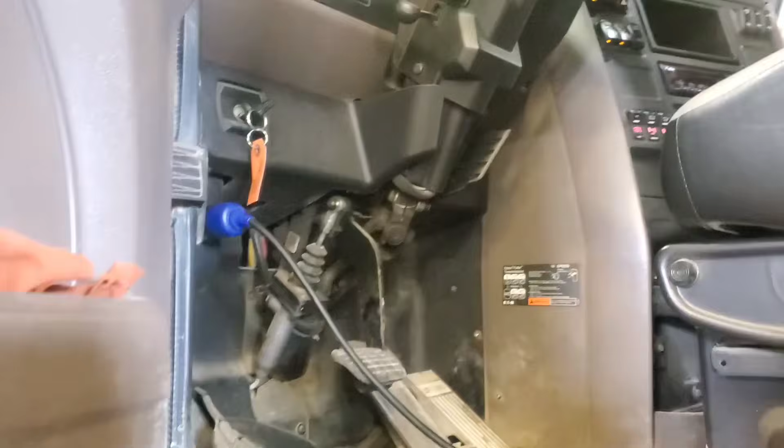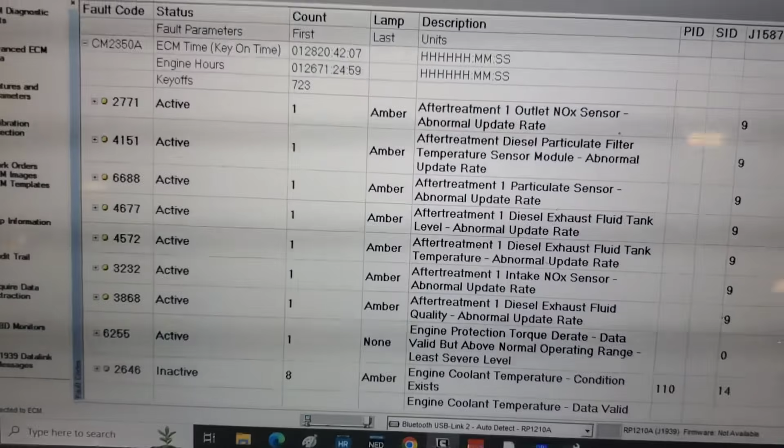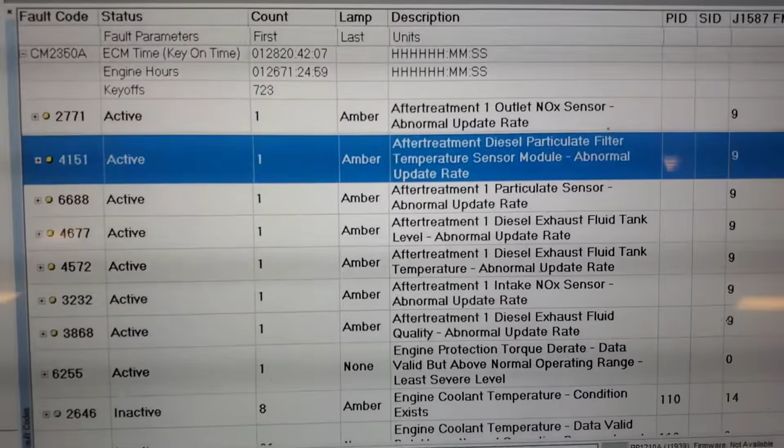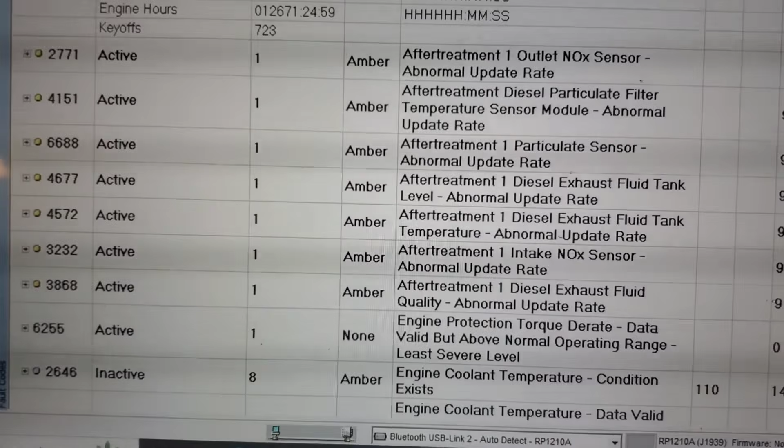What's going on, everyone? Got this unit here that has check engine lights and DPF lights, everything on. Hooked up to it, and we have every code in the book for the aftertreatment. So we have our NOx outlet sensor, DPF, temp module, particulate sensor, like all our aftertreatment codes on this thing. So that's leading me to believe we have a failed power or ground circuit that's providing the voltage to all these sensors, or we could also have a failed data link.

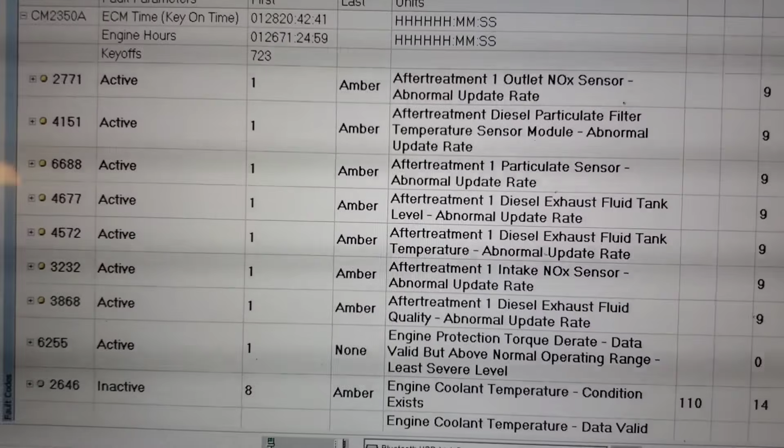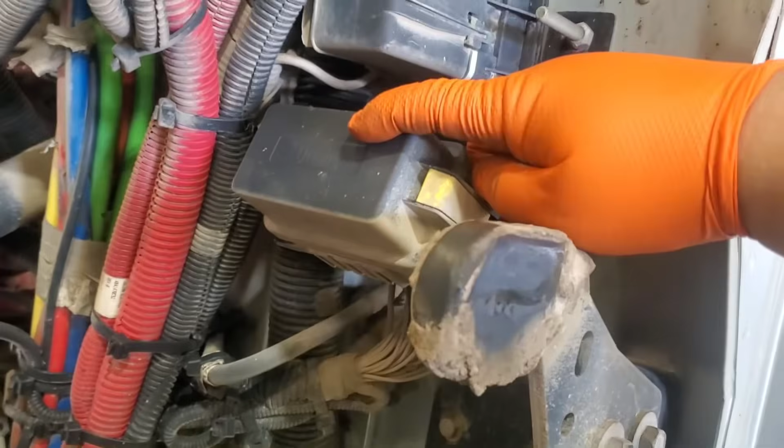So basically what I'm going to do is just grab any one of these sensors and perform the voltage and ground test on it. First thing though, I'm just going to go to our aftertreatment PDM and see if I got any blown fuses or anything. Okay, so this unit's an International HX, which on these chassis, the aftertreatment PDM is right here. Makes it nice and easy. So I'm going to open this up and see if I have any blown fuses.

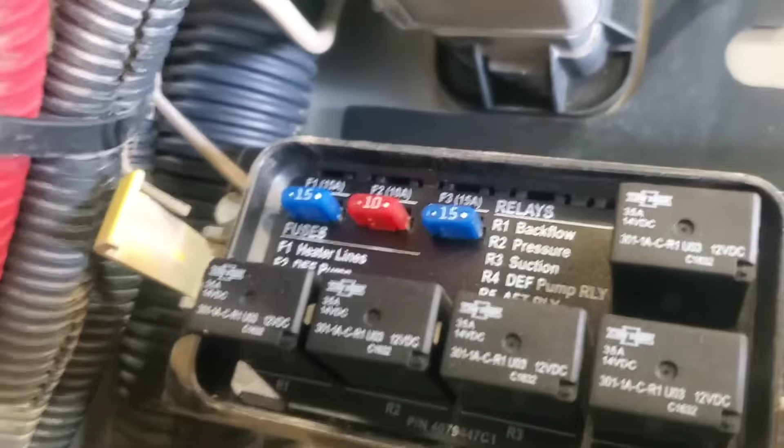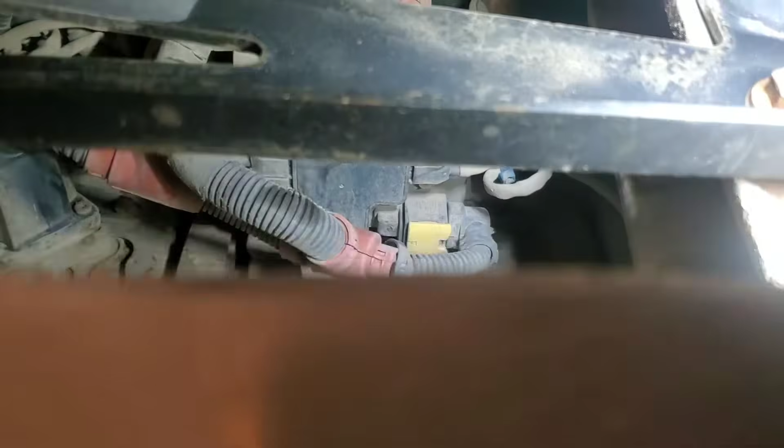Alright, well, I tested all the voltage for those fuses. You got volts on both sides, so none of the fuses are bad. I'm going to go ahead and just grab power and ground and the data link off one of the sensors. So preferably the easiest one, so I'm just going to find which sensor is easiest to get to. Okay, the temp sensor module is right there. You can see that yellow connector hooked up to it. That seems to be a pretty decent one to get to. I'm just going to remove this shield here, then I'll be able to get right in there and pop that off and do some tests.

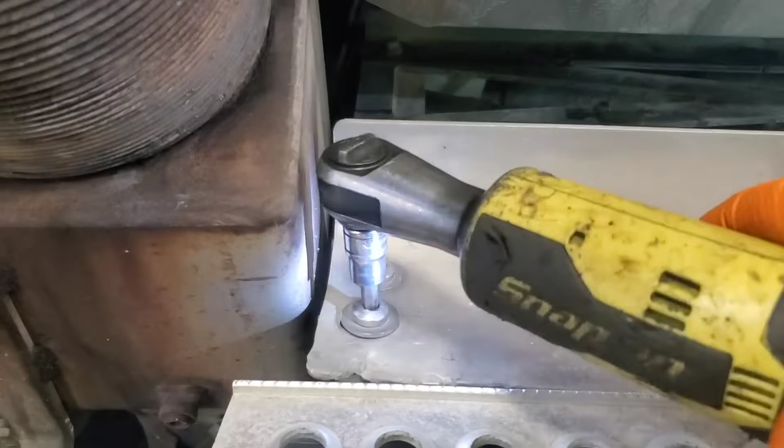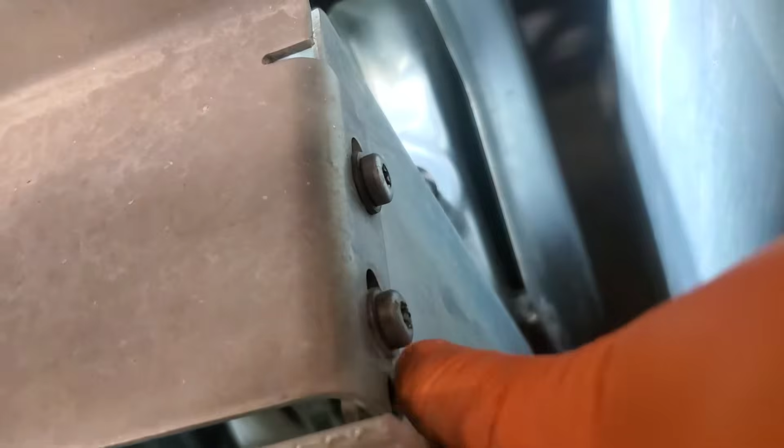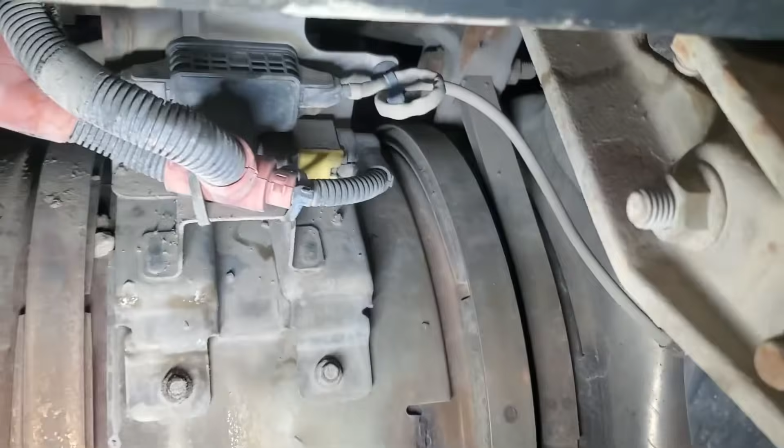Classic. These ones have nuts on the other end, and this one's stripped, so that's cool. Okay, got those out. Just these last two here. Okay, there we go. Now, got a nice clean shot to pull that connector off. But look what I found here. Those clamps are all rotted and split. Let's get a better look down below. Alright. Yeah, look at that. That sucks. So pretty much this whole system's gonna have to be dropped to fix that.

Got to notify the customer about that. Hopefully we don't get the good old "well, it wasn't like that before I brought it here" treatment, because that happens more often than not.

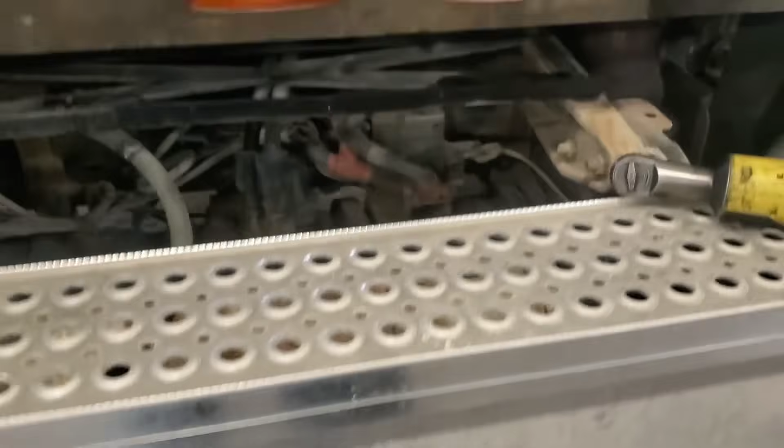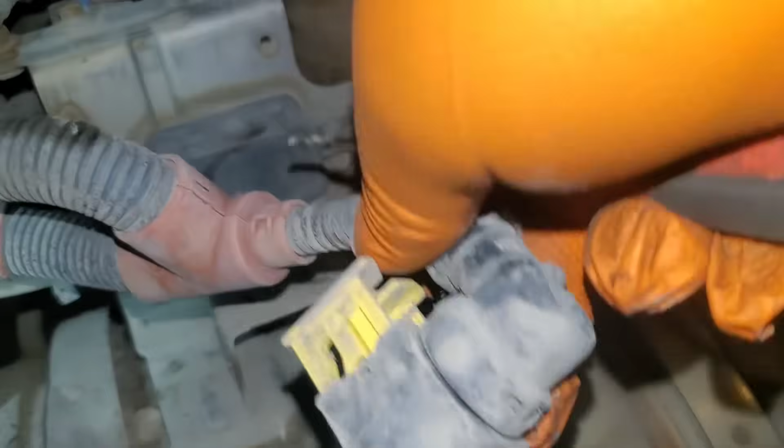Alright, got to be a little careful with these connectors so they don't break. I'm just using the hook tool like this, coming in there and kind of prying out. As you can see, pull it out and the connector comes off. Sometimes you got to be a little more careful so it doesn't break. But now you're gonna have power, ground, and your CAN high and low circuits. So I'm gonna test to see what I have there and what I don't.

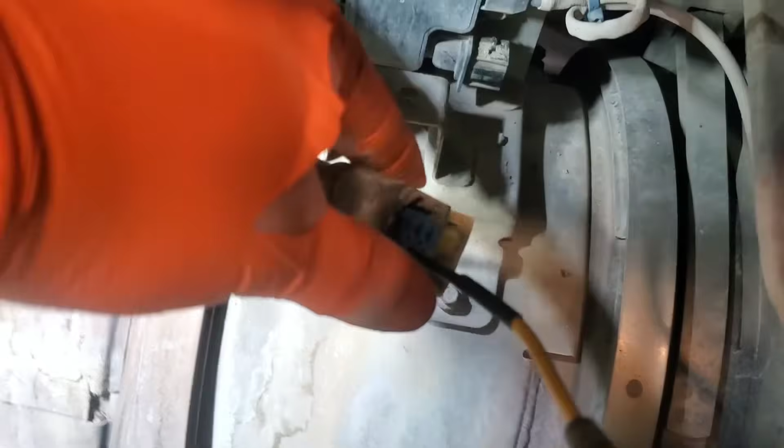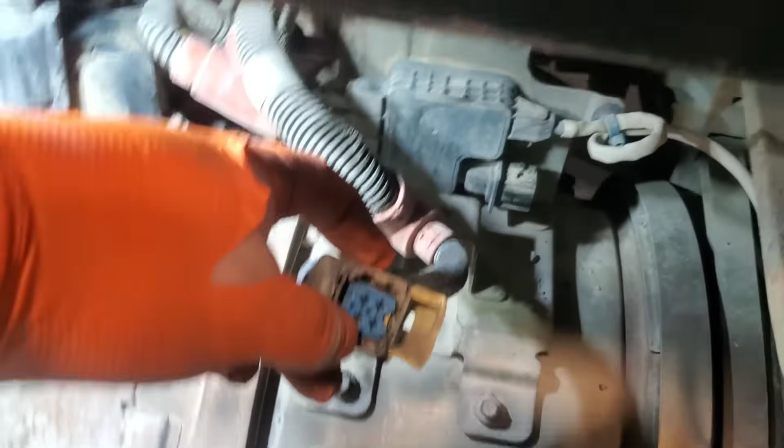Okay, so I have my CAN high and low and I got a good ground. This is the power circuit here. I'm getting nothing on this. So our issue is a power issue. Since our fuses are good, the problem is between the fuse and the circuit that powers the whole aftertreatment harness. So gotta find where that tees off and goes in and supplies all these sensors. Now there's a spot on these HXs that I found bad before, so I'm gonna start there, which is by the PDM.

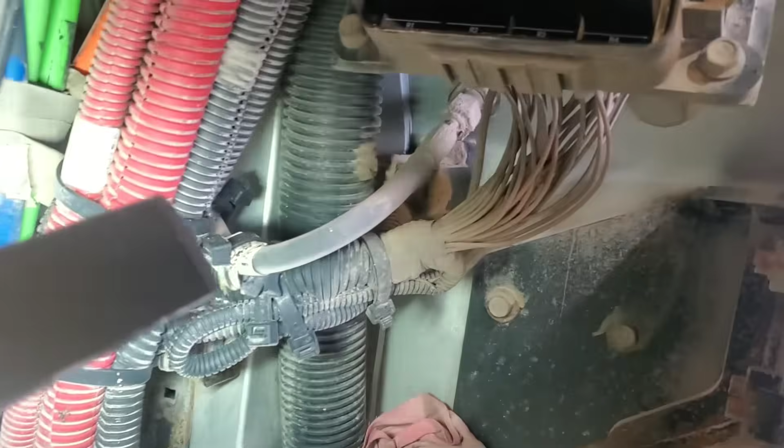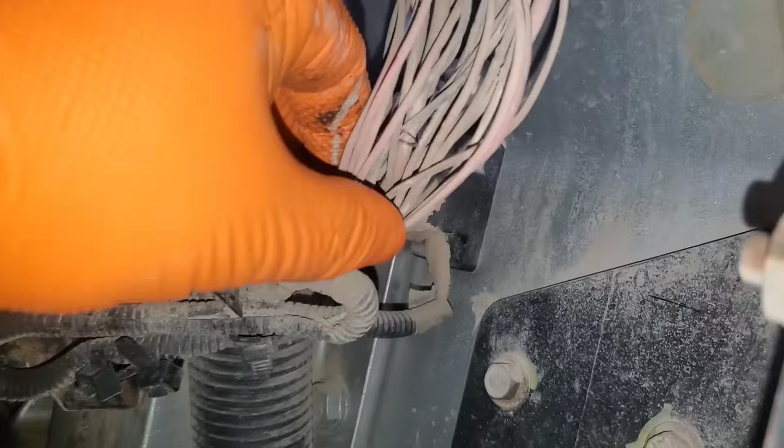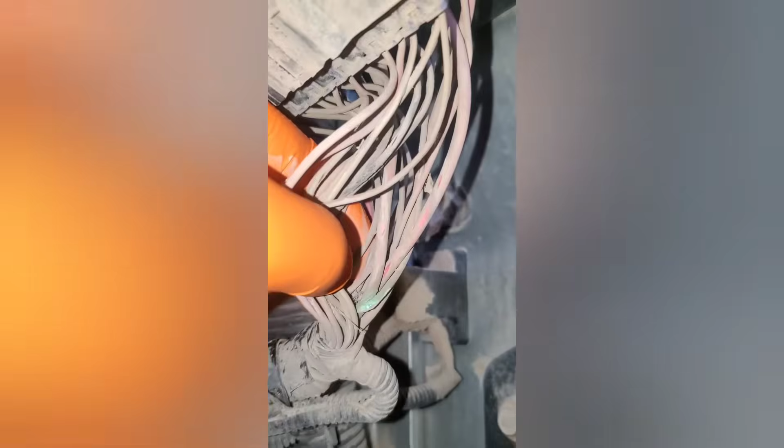Like right in here, I found this being an issue before. So I'm gonna pull that apart, pull that loom off and see if I can find anything corroded or rubbed through. Okay, as you can see, I just moved some wiring around, and sure enough, there we go. Bunch of green. So that's right in the exact same spot that the previous few of them were. So that's a nice fix. Repair that with the 15-cent butt connector, and the guy will be on his way. Oh yeah. Awesome.

So what I've done is I grabbed the circuit right from that temp module sensor, repaired this wire, and you can see now we got our 12 volts back. So that's a successful repair. Right there. Alright, putting all this back together now.

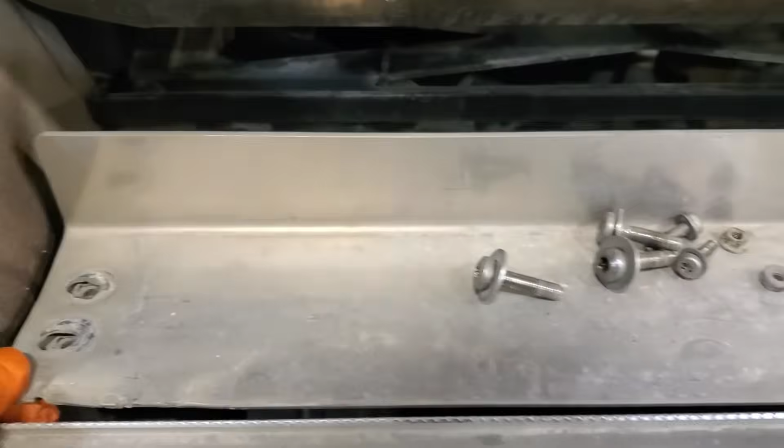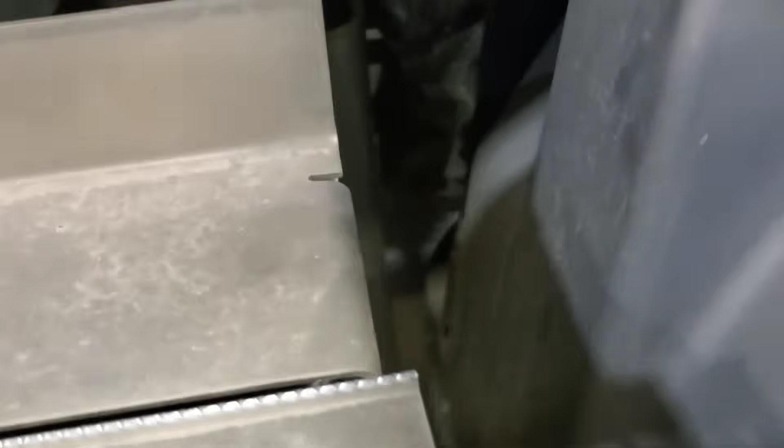Just want to mention this. Do the next guy a favor. Use anti-seize on these bolts. They're really annoying when they seize and strip. So yeah, this stuff I find is the best. I've been using it for a while. And yeah, just do the next guy a favor.